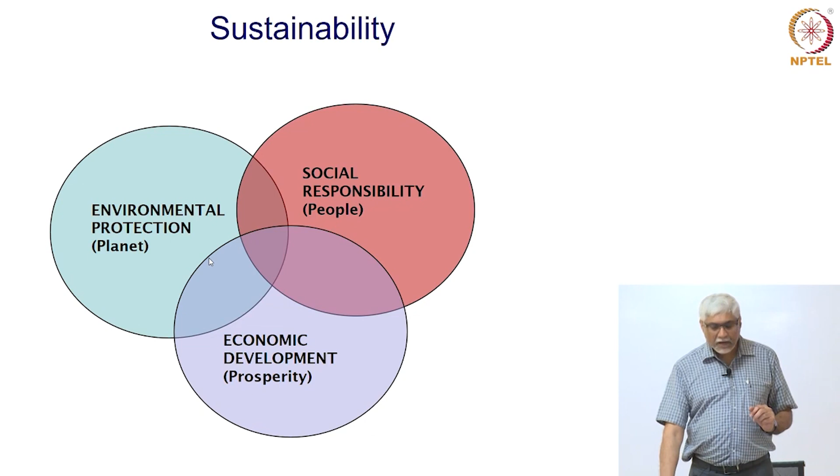We can go into more detail about the part of sustainability which influences people, or the social responsibility. We could look at the different aspects that will benefit people or can affect people. What comes to mind right away is that people should have a place to live and to work that is comfortable, should have water, food and so on, and comfort, hygiene. These are things that people would require to live in a proper way.

Further, we look at transportation, how people can move about without wasting a lot of time, without facing a lot of difficulties, how people can be transported. So these could be aspects of social responsibility that engineers, particularly civil engineers, could be concerned about.

About the environment, what is it that we want to protect? What should be protected in the natural environment, in the planet, so that, as I said before, future generations are not affected and other species that we share the planet with are not affected. So natural resources are of very grave concern. We cannot use up all that there is on earth for satisfying the needs of the present generation or just the next generation. So we are very much worried about conserving natural resources.

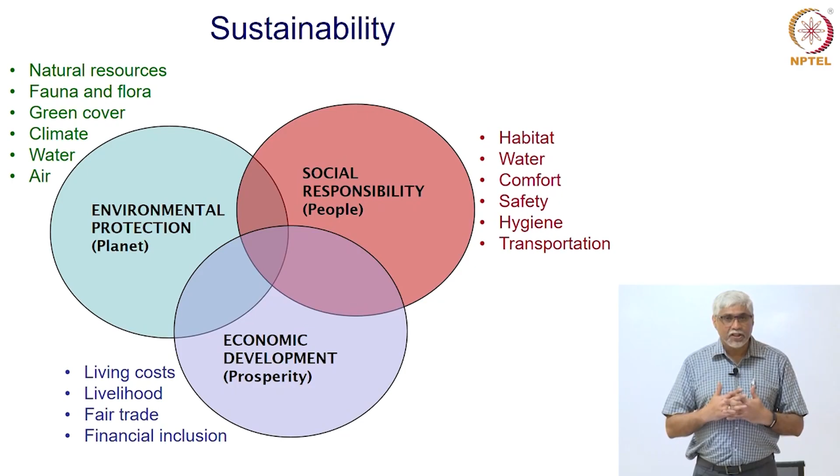So, to summarize what I think civil engineering does for sustainability, for improving sustainability, civil engineers and civil engineering provide infrastructure which is very important for economic and social development, for commerce to happen, for industry to grow and for people to be happier and more comfortable. We need civil engineering infrastructure like bridges, transportation systems, water networks, sanitation and so on.

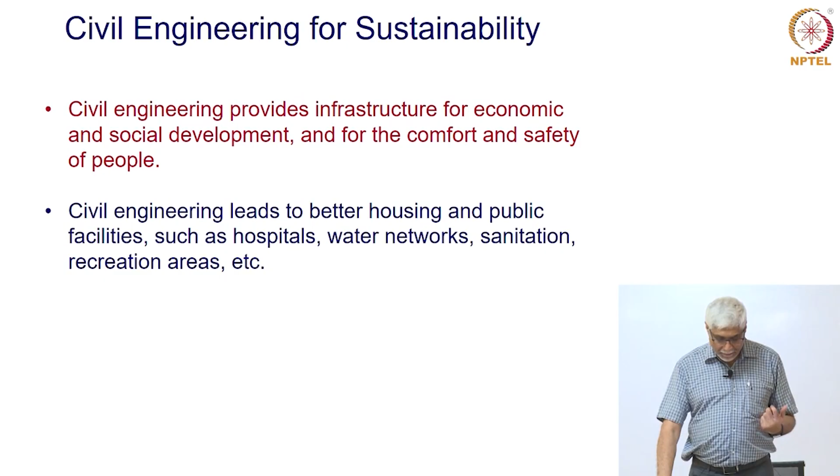Civil engineering also provides or tends to provide housing, better workplaces, more comfort and safety. We also deal with infrastructure which is for public use such as hospitals, water supply networks, sanitation systems and so on. So, these obviously are beneficial to people, to commerce, to the industry. Further, civil engineering in most large projects, and probably more and more in every project, plans or tends to protect the environment and the natural resources within the planning and execution. We don't want to have a project that will use up all the resources which will create harm for the environment.

Okay. So, let us look at specific examples and see how different disciplines of civil engineering contribute to making something that is useful in these different contexts. The first thing that comes to mind in our country and many parts of the world are railway systems. So, I think all of us who are here or listening to this lecture have used the railways at some point in time. It provides connectivity, it provides for movement of goods as well as people, and communities are connected. Isolation of communities ends. So, these are very clear benefits of having railways.

So, to make a railway system like the one here in the image, this is the Konkan Railway. The Konkan Railway was a massive project, a landmark project for our country. It took from 1989 to 1998 to complete. It was a very big exercise because, simply in terms of land acquisition, 40,000 people had to give up some part of their own land for this project to happen. About 2,000 streams and rivers had to be crossed.

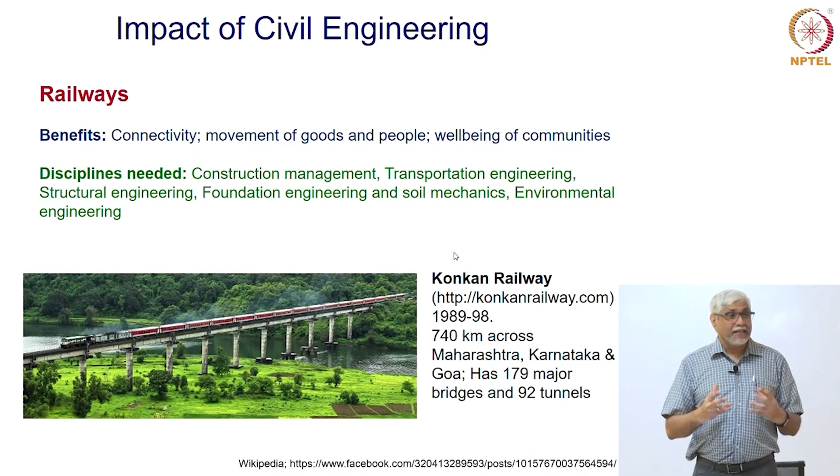Similar to railways, we have airports becoming very important. A community, a city or a town is said to have developed when it has an airport. So, it is always a landmark when a city claims that we have an airport. Some cities claim to have more than one airport. So, this means that these regions are very developed. It is a sign of development other than connectivity and goods.

The image here is from one of our newest airports in India called the Pakyong Airport in Sikkim, built at a height of 1,400 meters, and very importantly this came about because they could cut a part of the mountain. Almost 100 meters of mountain was cut for this runway and the airport to come up. So, all this soil had to be, will continue to be protected so that it does not slide down.

So, major geotechnical engineering had to be done to hold this part of the mountain in place so that it does not slide down. So, pavement engineering, what kind of pavement will be stable, will not move, will not deform over time? How do we ensure that this slope is stable and does not slide down? How do we reinforce it? How do we design the reinforcement? Geotechnical engineering and soil mechanics again plays an important role.

Construction management. At this remote area, how can we make technologies available for fast construction? Okay? And transportation engineering obviously to plan the systems, how to control traffic, how to make sure that planes can land safely and take off safely. Okay? So, this is also an example where again connectivity has been brought in.

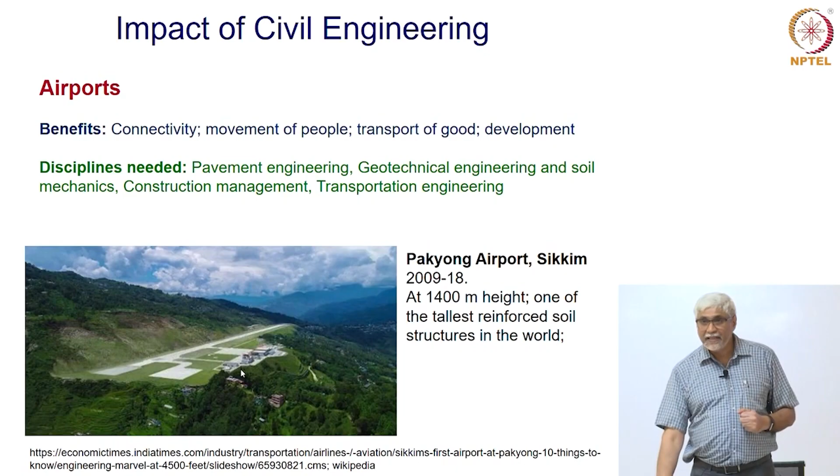Sikkim did not have an airport for a long time and people had to travel by car or bus to reach Sikkim. Now there is an airport, so tourism will improve, trade will improve, commerce will improve, and connectivity is better. Within cities also people have to be moved, and we find that in India almost all the major cities have a metro rail project.

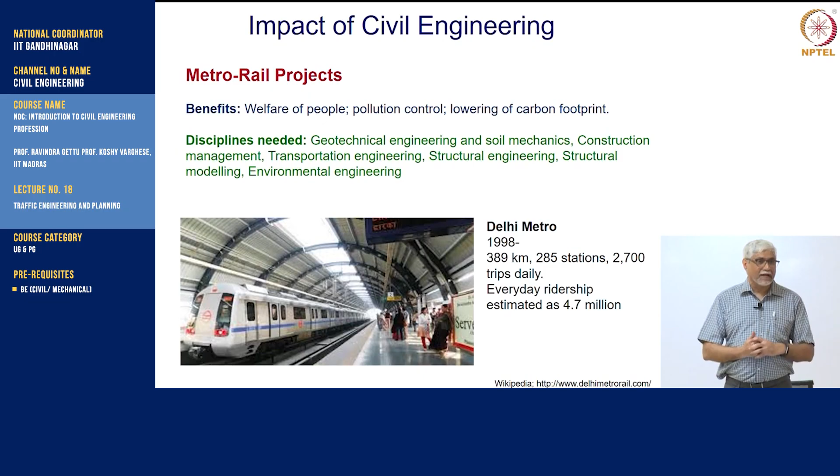And it is also almost guaranteed that until the class of today retires, there will be at least one if not more metro rail projects happening. Why are these so important? Because we can decrease the traffic congestion, we can have people reach their office from home, go from one place of commerce or entertainment to another quickly without causing so much of a carbon footprint when they have to use their own vehicle. So the welfare of people is very, very important.

People, if they are able to move around efficiently and economically, will promote the society. Pollution is better if you imagine everybody using public transport instead of their own transport, a scooter or a car. There is a lot of pollution, and the whole carbon footprint decreases. What do we mean by carbon footprint? It is the carbon dioxide emissions coming from burning of fuel, from using machinery, from making machinery and so on. All this will decrease if we have better metro projects, more metro projects.

So again, a lot of these metros utilize tunnels. For example, the Delhi metro started construction in 1998 and it is still going on, they are adding more and more. Right now, it spans about 400 kilometers, 285 stations and 2,700 trips daily, which can take about 5 million people every day through Delhi.

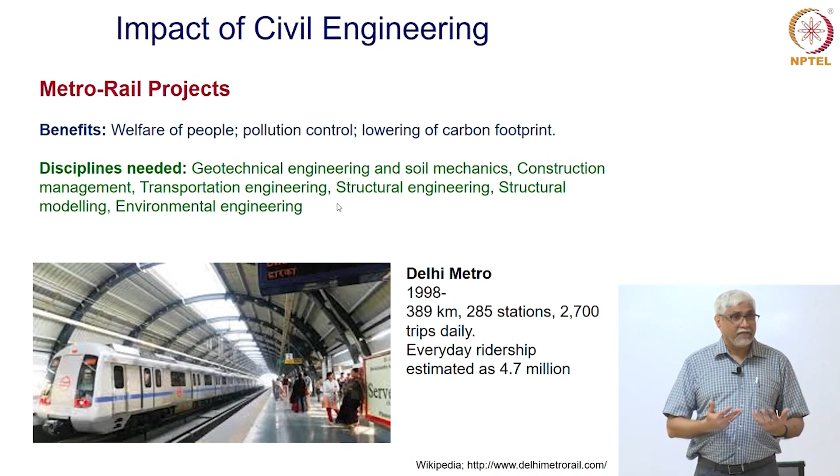So, here environment protection was very, very important, and health, because if you have this toxic water or waste lying around, eventually it reaches the groundwater, and groundwater is what we eventually will drink. Other things get affected, animals, plants, the environment itself changes and gets affected if we don't clean up. So, this means environmental engineering has to take a major role, decide how to clean up, how to make sure that what we cleaned up is not causing a bigger mess or bigger problems.

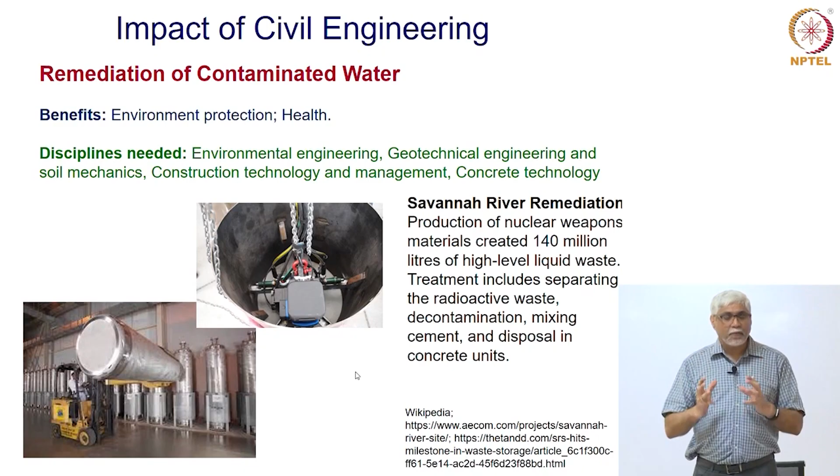We talked about projects. We can also talk about smaller projects, systems of civil engineering or even elements. Bridges, which form part of many of the projects that we've talked about, connect people. You might have experienced by yourself that when a bridge is built, new commerce comes up.

Small populations rise around a project, at the beginning and at the end of the bridge, and shops show up and commerce increases; connectivity is better. Instead of going around a bay, they can cross the bay faster. Okay. So, carbon footprint decreases, pollution is less.

So, again, structural engineering is important, modeling is important, because we want to know that the bridge will be stable for many, many years, that it will not settle down, it will not break, it will not crack. Geotechnical engineering for the foundations, construction management, transportation, environmental engineering, and so on.

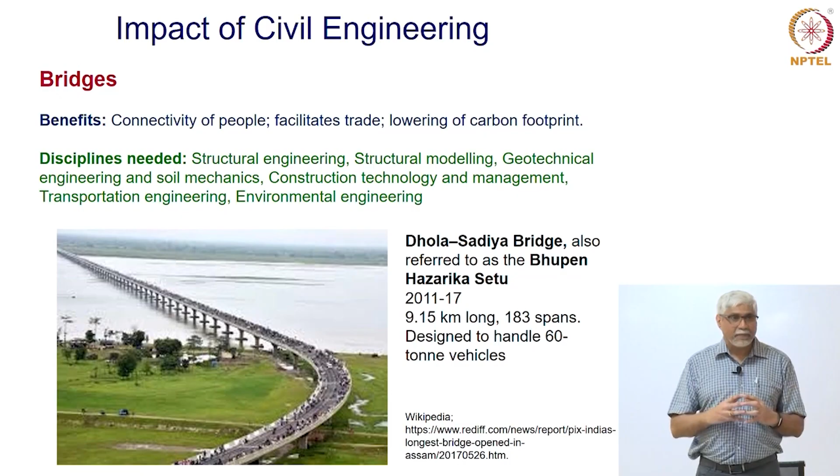Why do we need oil? We need energy. For progress, we need energy. For economic progress, it becomes very, very important to transport oil with the least carbon footprint, messing up the environment the least. Instead of having trucks and tankers, can we have a pipeline? But you can imagine a pipe running 1,300 kilometers. There has to be a lot of modeling done because the pressure should not drop, there should not be leakage. If there is a leakage, we should be able to detect it.

So, a lot of sophistication comes into modeling it, constructing this, what type of structures are required to keep this pipeline above ground, what sort of modeling is required, and the geotechnical engineering: what will happen when there is freezing and thawing of the ground, when there are colder temperatures, how will things change. So, these are major projects, very unique. This is not something that you hear of every day, but a project like this can last for a long time and will require major management to make it work.

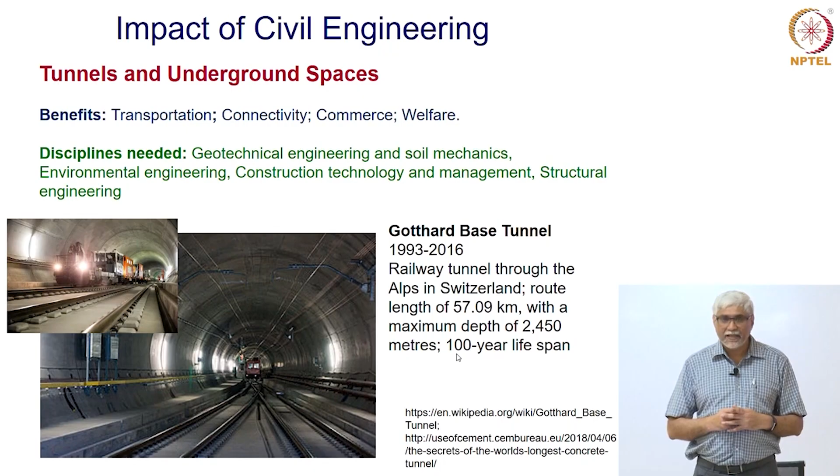Talking about modeling and engineering and planning of traffic. The modeling of traffic in cities, between cities, is becoming more and more complicated. And in a country like India, you have all sorts of traffic, what they call multimodal traffic on the road. You have an auto rickshaw, you have a cycle, you have a bike, a big bus, a car, and so on.

Further, what people are looking at is automated vehicle traffic. You must be hearing on the news that there are driverless cars, where instead of driving your own car, you are just enjoying the ride or being transported. So, there is a lot of traffic flow modeling which is happening in all these cases of possible traffic being only of automated vehicles and driverless vehicles. Groups of vehicles, how are they going to travel in the roads, through the roads and into the cities?

Why would we do it? We want to decrease time delays, we want to decrease congestion, we want to improve the health and safety and facilitate commerce. So, transportation planning and modeling becomes very, very important. All of you who have been in cities, most of you have, will know the chaos that happens when there is rush hour, and this can happen in many major cities.

Now, imagine that all the vehicles are driven by themselves. In current circumstances, it would be chaos, the cars may never move. So, we have to know how to model the flow and control the flow such that everything will happen well. So, traffic flow theory is important to model such movement and work on it on the individual vehicle and groups of vehicles. How can you make groups of vehicles move forward? How can they interact with each other?

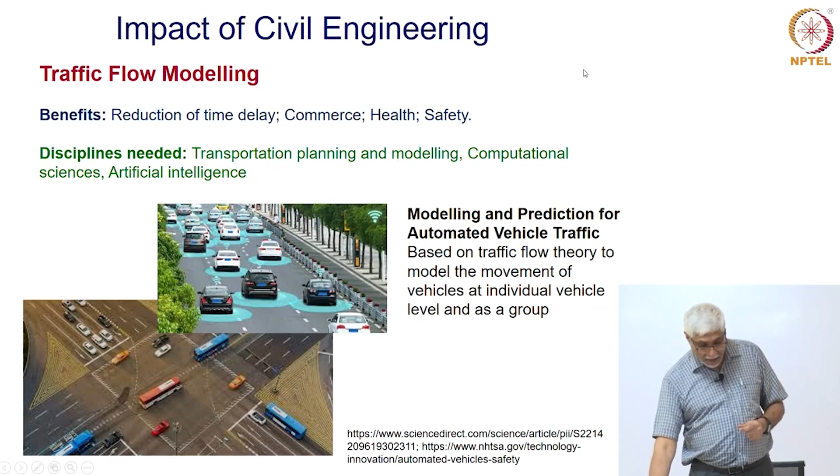So, traffic flow modeling again is something becoming more and more important, especially when we are talking about automated, connected vehicles that are going to come up in a bigger way. In construction again, we have a lot of automation. We have robotics in construction which is becoming very, very important, more and more usage. Why? Again for quality and safety.

Instead of an unskilled worker being involved, suppose we have a robot that is properly designed. We can ensure quality, safety especially in difficult environments, faster construction. Construction speed dictates the cost and also how fast we can deliver comfort, safety and facilities to people. So, this means that construction technology becomes very important, computational sciences because different machines have to interact with each other, machines have to talk to each other, artificial intelligence becomes important.

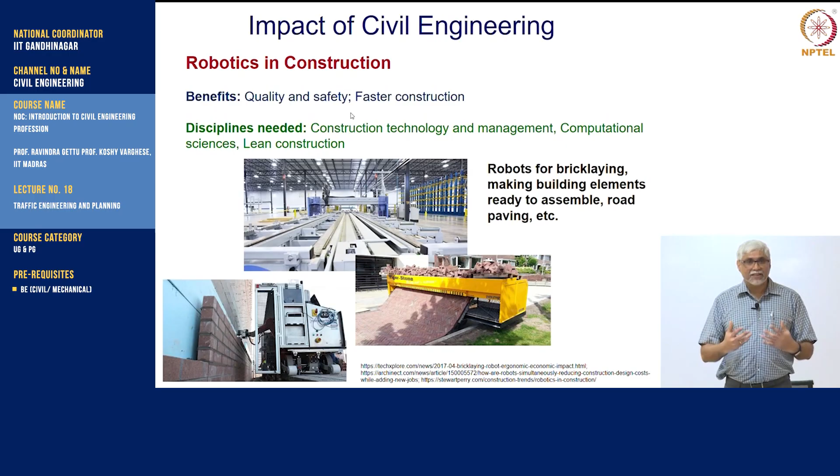And what is coming up more and more is what is called lean construction. Lean construction is where you have less wastage, you have faster construction and less errors creeping in. So, there are already robots that can make brick walls like in the bottom left, and then you have other robots which are making elements to make a house or a building. In factories, robots are constructing these elements which can then be taken to the site and assembled.

This is a robot that you see here which is paving an entire road. There is a pile of bricks and this robot is now putting these bricks together and just laying out a road as if it is unrolling a carpet. So, this means that we have to design properly the material, the system and understand what the road is going to go on.

Okay. So, these are things like the automated vehicles, new technologies which are coming up. We are looking forward and this is where I am trying to answer the question of, is civil engineering sustainable? As long as we do our job of making sure sustainability is there and as long as we are bringing in new things all the time in civil engineering, there will never be a possibility that civil engineering goes out of fashion or out of requirement.

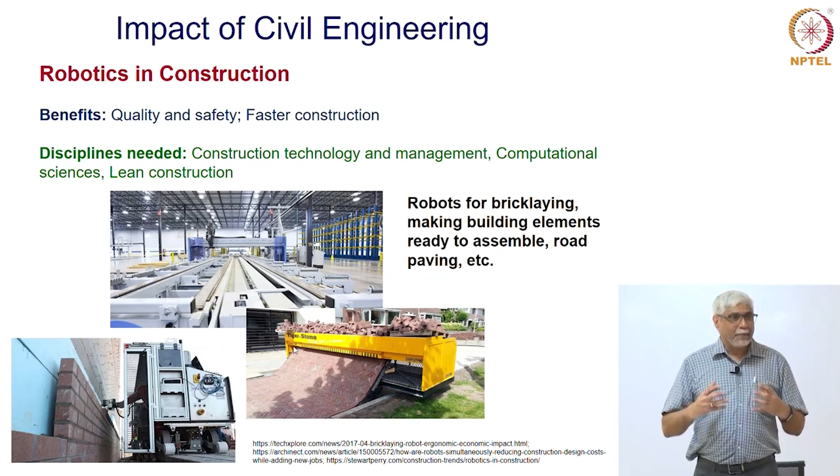These are the things which will keep civil engineering sustainable. Talking about roads again, there is a new technology which is looking at precast concrete pavements, where instead of the long process that all of you have experienced of laying asphalt, laying concrete to make a road, can you make the concrete like Lego bricks somewhere in a factory, have them piled up and when it is needed, bring these panels, put them together and you have traffic in a few hours crossing.

So, this could be used for new pavements and for pavement repair. Okay. What do we get? Quality and safety. Instead of the potholes, can we have a new road fast? Can we have a road repaired fast enough? It will be more economical in the long run to get it done.

So, this means we have to understand how the concrete will behave, how the technology will be, can we bring in robotics, can we bring in automation, how do we make sure that all the pieces stay together and for a long time. Again, lean construction, no wastage, can we make it faster, less wastage and more economical. So, this is also some new technology which is coming in.

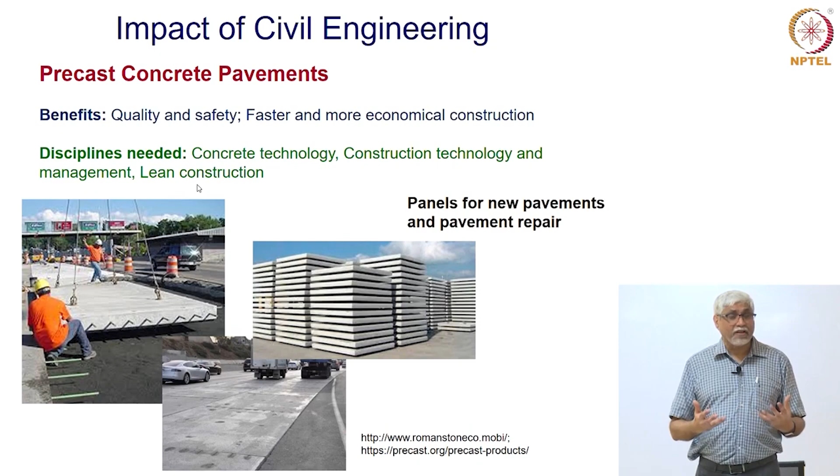Talking about concrete, can we make concrete more specific to what we want? Concrete traditionally, which was also discussed in this course, was a mixture of cement, water and stone pieces, what we call aggregates. But now new chemicals are being put in to go from a site which is like this with a lot of people, a lot of energy. You would have seen in every construction site there are so many people, some pouring the concrete, some leveling the concrete, somebody vibrating the concrete and again leveling, supervising and so on.

Can we go for a concrete that just pours itself? Even can we avoid a concrete which needs a reinforcement? Can the concrete come along with the reinforcement? Will not require anybody to pour the concrete. So, I will show you a video. This is from one of the works that we have done here, where we have a self-compacting concrete, does not need much help being poured and vibrated and compacted. It sort of pours itself.

Further, what does it do? It brings its own reinforcement. The reinforcement is mixed into the concrete itself. So, you do not have to put these bars all the time and make sure that they are in place. So, this is a concrete which is mixed such that it can flow over a long distance. You do not have to have a lot of people. You have to have some people to level it off to check everything, but not too many people around.

So, what are the benefits? Quality, safety, faster construction, better working environment. You do not have to have so many laborers all the time working hard. We just have to have somebody leveling things off. This means that we have to understand concrete technology, we have to understand construction technology, and this will lead to concepts of less wastage or leaner construction.

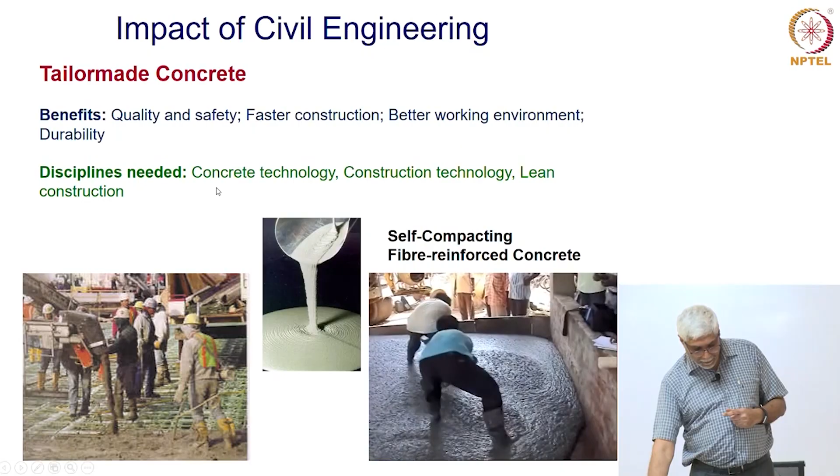We talked about remediation in terms of water. What do we do with all the waste from construction? We have buildings that have been built over a long period of time. When we want new buildings, we are going to demolish these. When bridges are old, we have to demolish. Where does all this waste go? So if you have seen, if you have experienced, they go into landfills.

Legal and sometimes illegal landfills, people just dump whatever they have from the construction or old construction somewhere, okay? And this is piling up and creating a mess, creating a lot of empty space that is being filled up by this. So, there is a lot of research, there is a lot of energy being put into recycling of this concrete. Old concrete is being used to make new concrete.

So, there are systems which are used to crush the concrete up, sometimes even at the same site. Suppose you have an old road, there are some machines which will chew up, remove the old concrete, at the same time make it into new concrete and put it back. You can have cases where it's accumulated from demolition sites, or you can even have cases where at the same site you use the old concrete, break it up, mix it back to make new concrete.

Obviously, this leads to conservation of resources and waste reduction. We cannot keep chewing up mountains, we cannot keep excavating mountains to make new buildings and new bridges or new roads. So, the thrust, the pressure is on, the society is putting pressure on construction experts to come up with ways of recycling concrete to make new concrete, recycling of construction materials to make new materials and new uses.

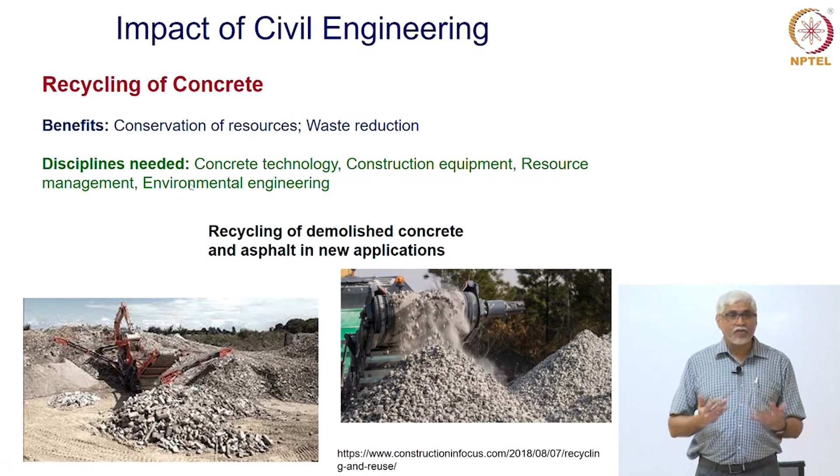So, to summarize, we have looked at how civil engineering can promote sustainability, can help sustainability. I have also tried to answer whether civil engineering will be in vogue, will we need civil engineering in the future, or will civil engineering be sustainable for long enough. If we have to do this, the future of civil engineering has to be different, has to incorporate new things, it cannot be business as usual. So, we can expect that civil engineering in the future will have certain characteristics.

First of all, it should become more location specific, it should be tailor made. One solution does not work for the whole world, even within a same country it will not be the same technology. We will have to understand enough that just copying a technology will not work, we will have to bring up new technologies, adapt technology.

So, civil engineering in future will be more location specific, will be tailor made, just like the word tailor, right? When you want clothes, you choose what you want. All of us do not wear the same clothes, right? All of us will not like to wear the same clothes, may not fit into the same clothes. So, the technology also has to be like that. We have to see what fits us. We cannot use something developed elsewhere blindly without adapting.

We should continue to be more protective about the environment. Many aspects, using of resources, using of water, contamination, destroying our natural resources. This will happen less and less, and this is what we are seeing as well.

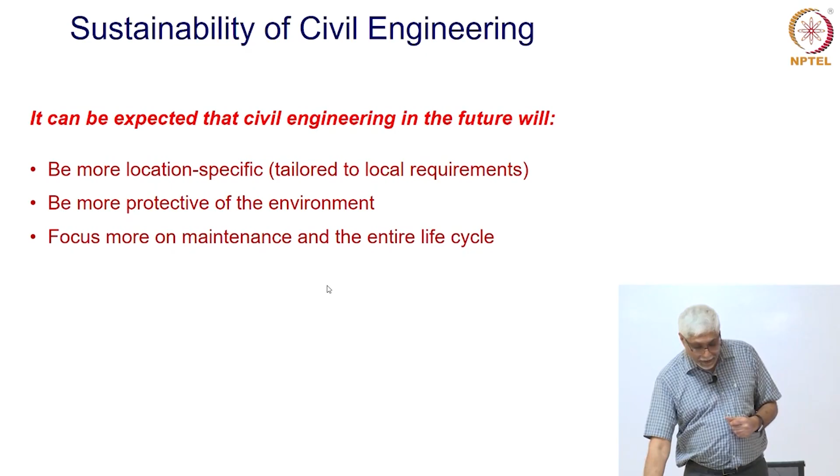Instead of using all new materials, we will use more of older material and we will recycle more and more. Just like many things, like plastics are being recycled. We can have more construction done with old construction material. We could even make it compulsory that when you demolish something, you should use all that material back in the new construction. We will involve more automation, less manual labor.

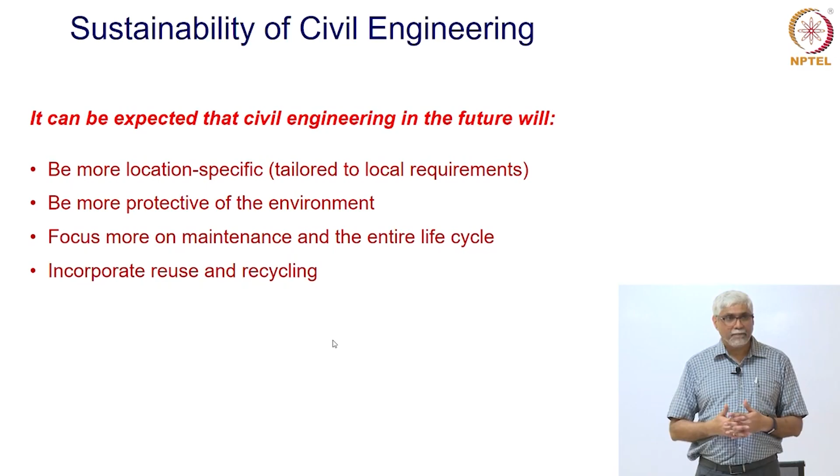Labor has always been a fundamental part of construction. We have used unskilled laborers, lot of laborers for construction. This means that there are some people who are always working very hard, not getting paid a lot and having limitations in what they can earn and have as a livelihood. So this will keep changing. We are seeing, like I mentioned, robotics and so on, there will be more and more automation.

We will also have construction that is smarter, buildings that are smarter. We will have sensors built in, just like we talked about automated cars. There could be buildings also which could incorporate sensors, tell us how we have to adapt if something is not comfortable. How can we change? Before collapsing, can it warn us that something is wrong in the structure so that we can control? So these are different aspects that I believe will make sure that civil engineering is sustainable and going to go on for a long time.

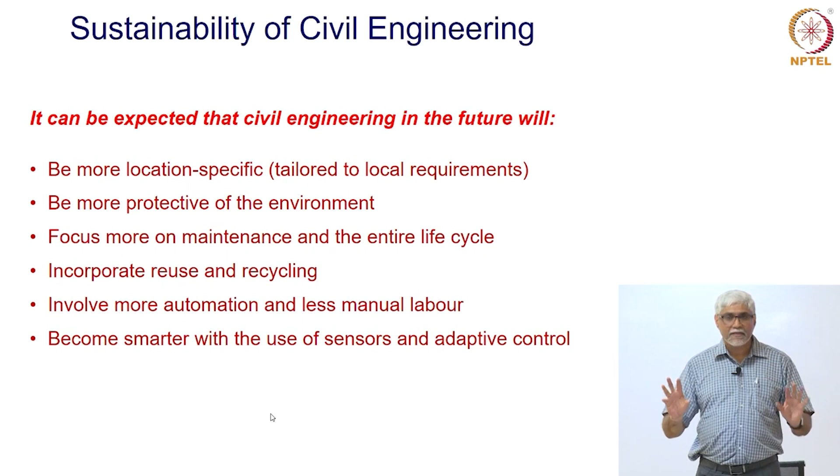So if I had to predict changes in civil engineering, these are things that will possibly happen to make civil engineering continue to be relevant and useful for society. Okay? So with that, I finish, and as I said, the idea was to focus on two aspects: how civil engineering helps in sustainability, and to also think ahead about how civil engineering will change, evolve, adapt to continue to be relevant to our society. Okay?